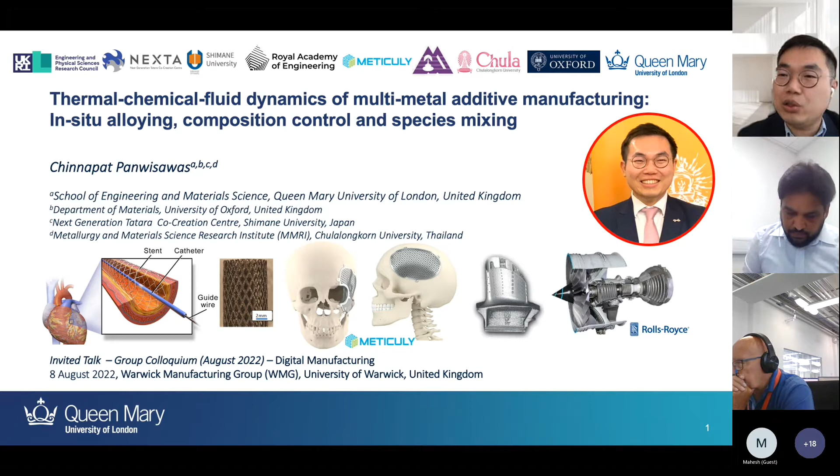So first of all, I would like to acknowledge the funding body from EPSRC and Royal Academy of Engineering, which actually supported some research activity in the past years, including the results from this presentation.

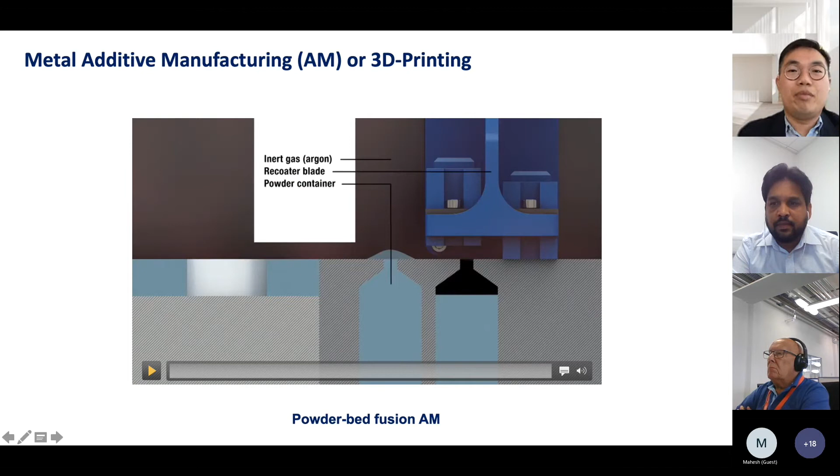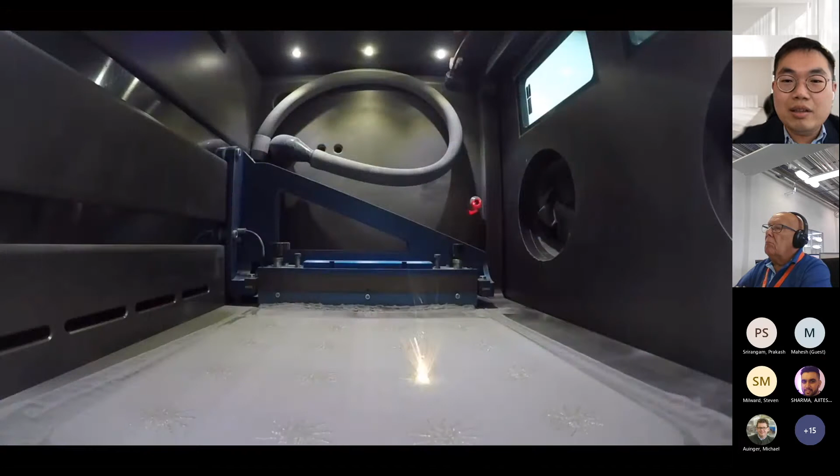So as you may know, nowadays people talk about metal 3D printing or metal additive manufacturing, or I would call it AM. One of the most popular techniques is called powder-bed fusion, where you have the powder spread onto the substrate, and then you use a laser to fuse them together, and construct it in a specific 3D geometry. There are so many things happening during this kind of manufacturing process, where you need to control and understand what happens in such a very small time and length scale.

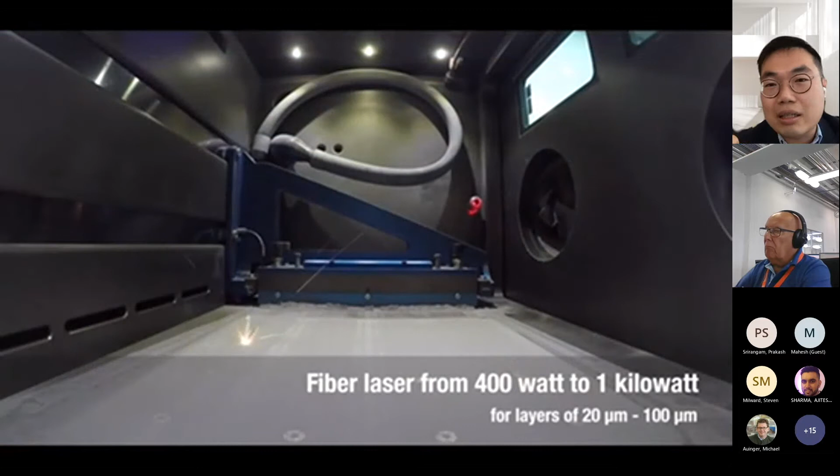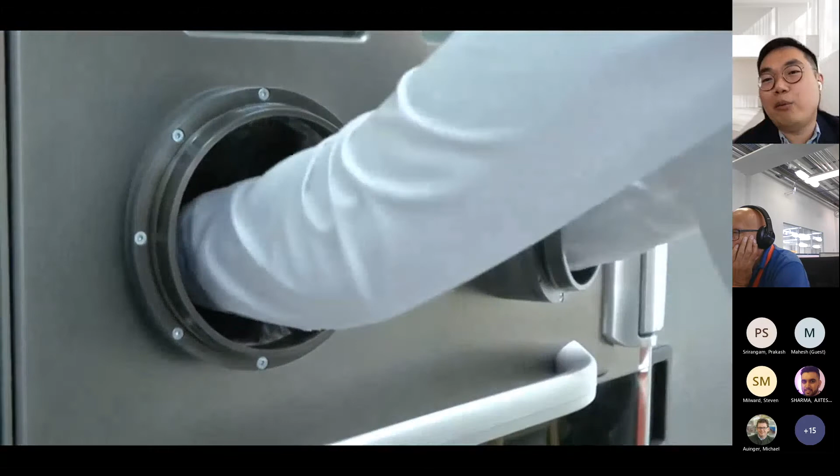As you see from this scheme, the laser beam size can be 100 micron in diameter, and then you fuse it in such a very short period of time. It leads to very extreme heating and cooling that make the microstructure and the property quite different from that of traditionally made alloys or materials.

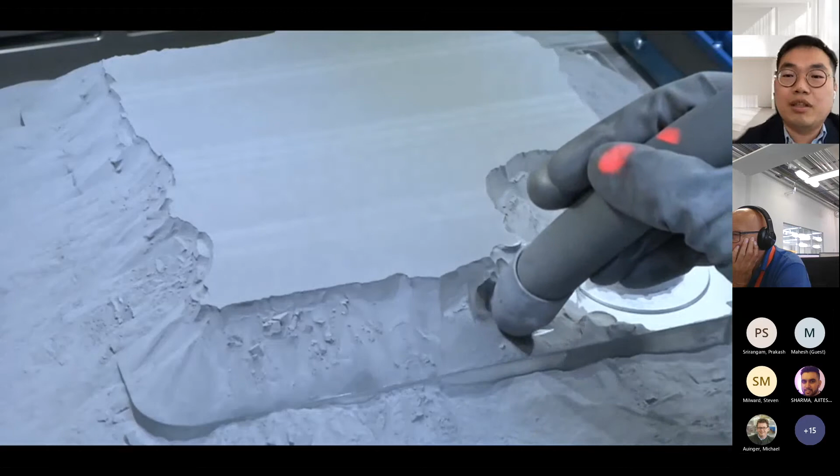So the talk today will focus on how we can see or understand the interaction of laser and matter to basically improve the process, to further develop multi-materials additive manufacturing. This is something I will focus on for today.

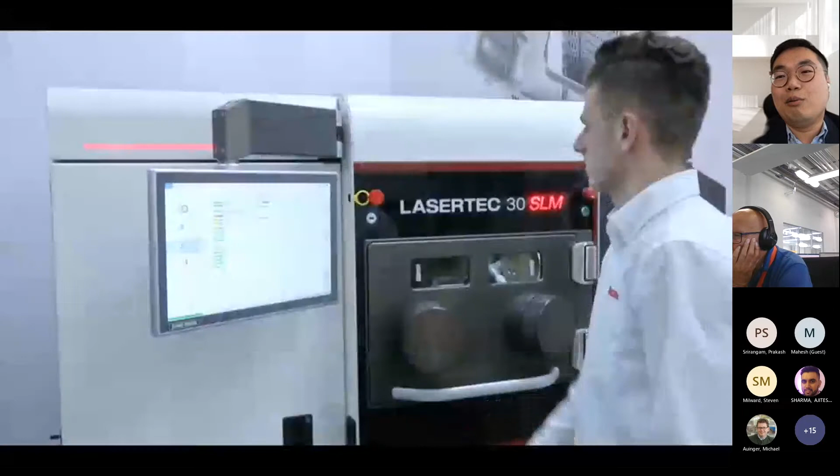And as you see, from the beginning to the end, from the powder and the laser until you get the component level, there's so many things involved in the process, which include the physics of laser interaction with the materials, the chemistry where you want to control whether or not you will get the same chemistry that you use as a powder. So, for example, some vaporization may happen, and then you get some chemistry which is not exactly the same as what you wanted initially. And then material design, definitely process design, in order to actually get the right condition for printing the part successfully.

Powder metallurgy to basically get good quality powder in order for you to get quite good quality of the part. And this is just the fundamental understanding that we need to put together in order to generate some kind of new approach to accelerate the technology using computational research, big data, artificial intelligence, and I will give you a little bit of the progress that we have been making in this field.

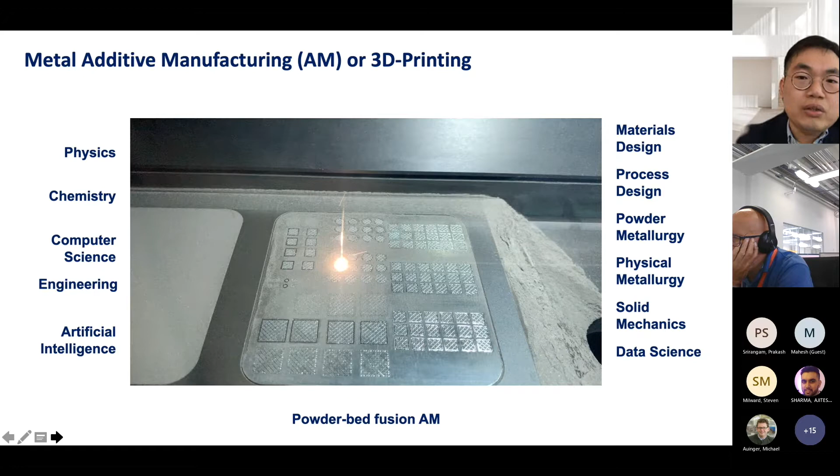So if I give you a little bit of background about the metallurgy in the specific field of the superalloy, I'm sure that some of you may be familiar with superalloy. Traditionally, we used a cast or wrought process to basically process this superalloy back in the 1940s. But every time we introduce a new process like powder metallurgy or directional solidification or single crystal casting even, we will introduce usually a new composition for that. That is because we optimize the material as a function of the process that you use.

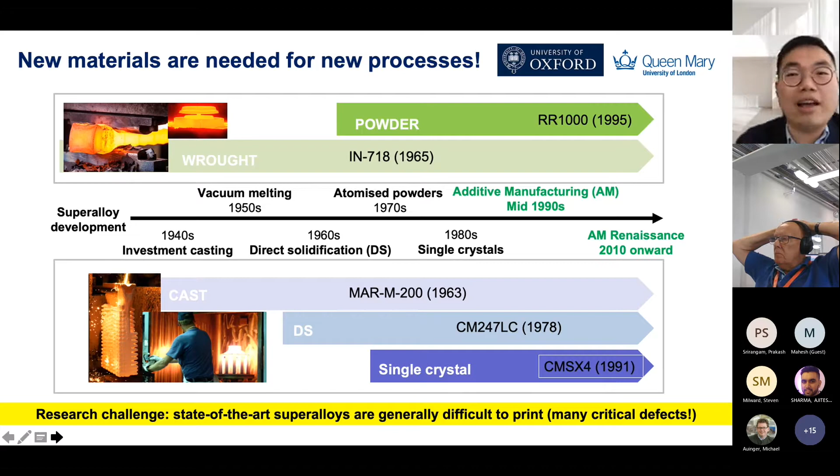It's probably the same for AM. That's because of the challenge at the moment: the state-of-the-art superalloys are generally difficult to print, so many defects can happen. So how can we go about it? There are two aspects: the first aspect is the materials, the second is the process.

In terms of materials, we can use an alloy design computational approach to find available compositions, benchmarked with traditional nickel-based superalloys. In this paper, we're looking at around 10 million compositions. We compare and benchmark with traditional alloys to come up with new processing and metallurgical windows that we hope will print better, based on physics-based models and merit indices for strength, creep property, and density. For process parameters, we're looking at freezing range and strain age cracking.

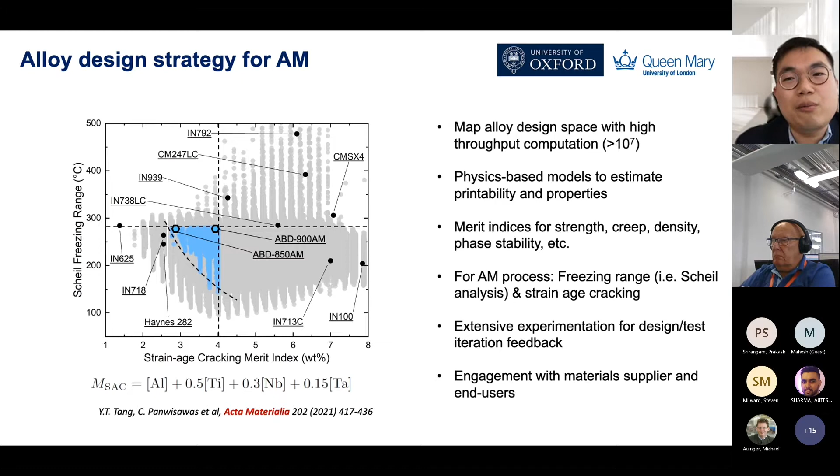This is a first step. We can say, okay, we want to find a new composition benchmarked with traditional available material that we want the property to match. Then we prove that with the new superalloy, we can actually print it better, so it's defect-free for a given condition. That's published in ACTA 2021.

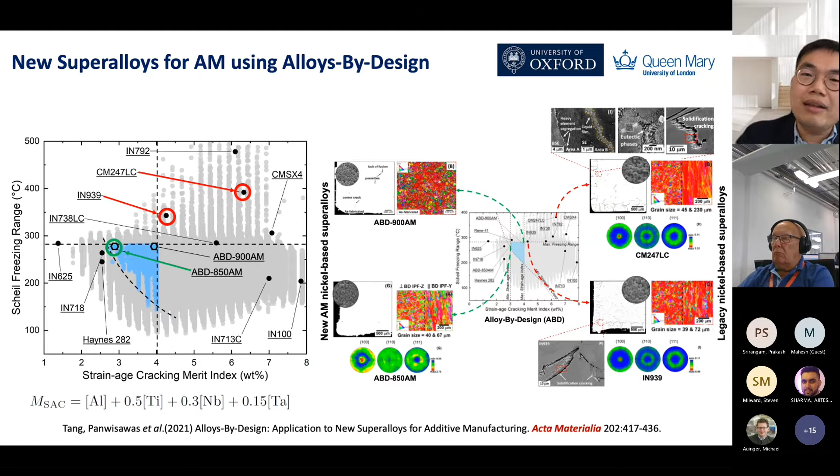In addition to the composition itself, we need to think about the process, because at the moment it's not just fabricating something simple, since additive manufacturing gives you more flexibility to fabricate. For example, you can do laser-based multiple metallic material additive manufacturing.

If you see in the middle of the screen here, the Eiffel Tower, from the bottom you see copper and steel on the top. There's a compositionally graded printing along the height of this Eiffel Tower. This gives us more flexibility to fabricate something we couldn't do before. The gradient has to be controlled in order for us to get the property, which may be a new property not seen before.

In summary, in this diagram, normally if you directly join bulk material A and B, it's a kind of welding. The gradient path method is a way you can do this using only additive manufacturing. For example, people try to fabricate stainless steel 304L with Inconel 625. This can be used for repair applications.

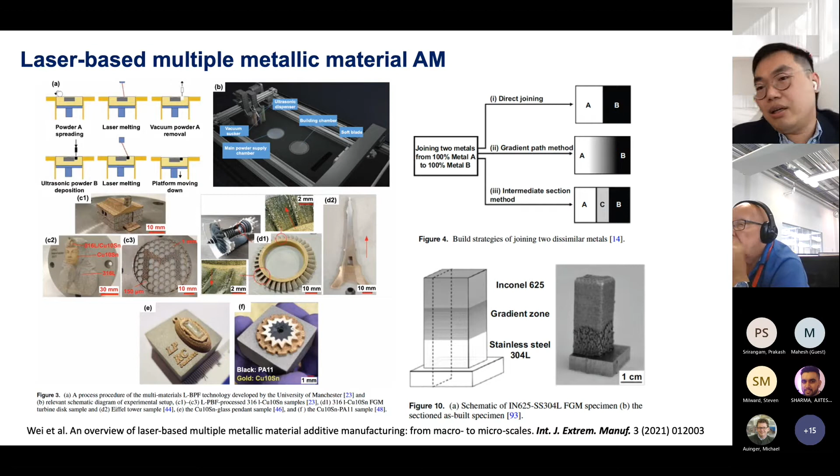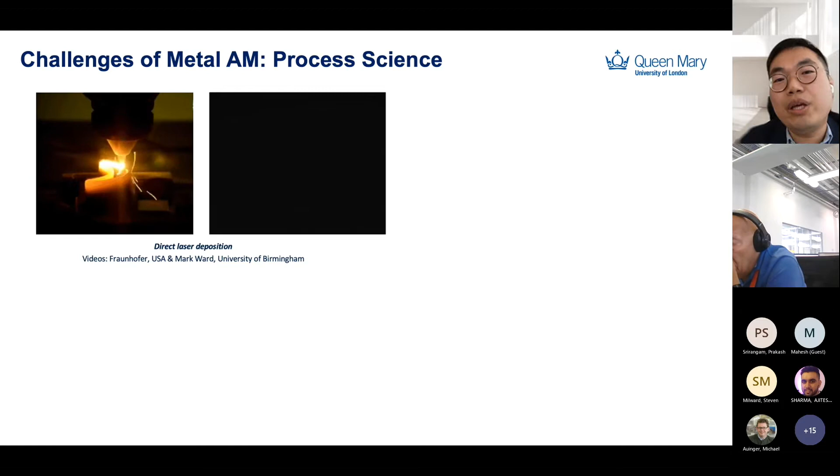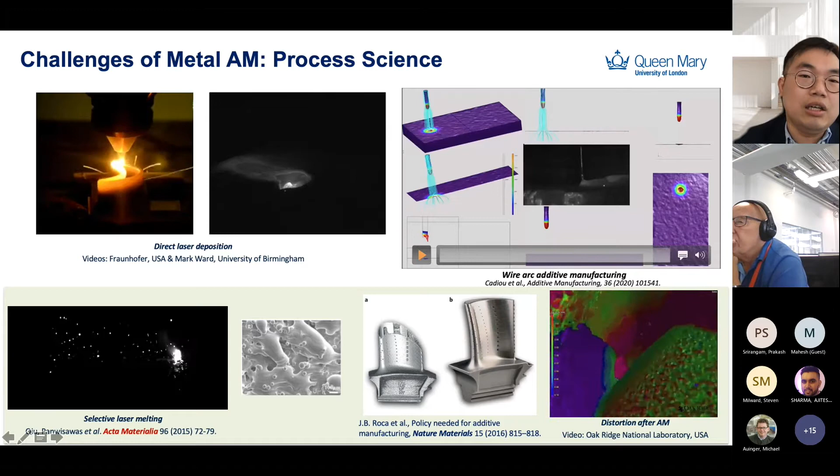But in order to get this technology successfully implemented in real manufacturing industry, we need to understand a little bit more. So if I try to summarize the challenge in process design, we're looking at three particular methods for 3D printing, which are direct laser deposition and powder bed fusion additive manufacturing. The thing in common is the interaction of the laser and the material, which is very extreme at a very short length and time scale. How can we go about understanding this in order to control subsequent microstructure and property scatter in the part?

If you look at some of my papers in the past, in 2015 we were looking at what's now called powder-bed fusion additive manufacturing, or previously called selective laser melting. If you vary just some process parameters, you can get totally different properties in terms of subsurface porosity, for example here. That's so important if you want to bring in a safety-critical component like a turbine.

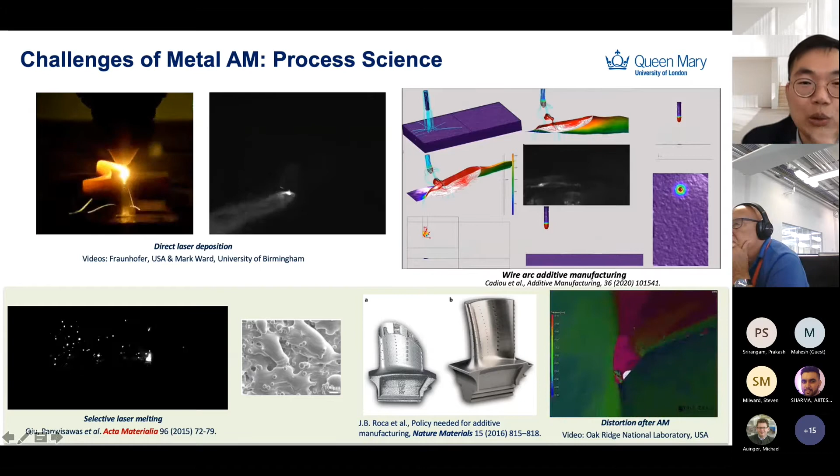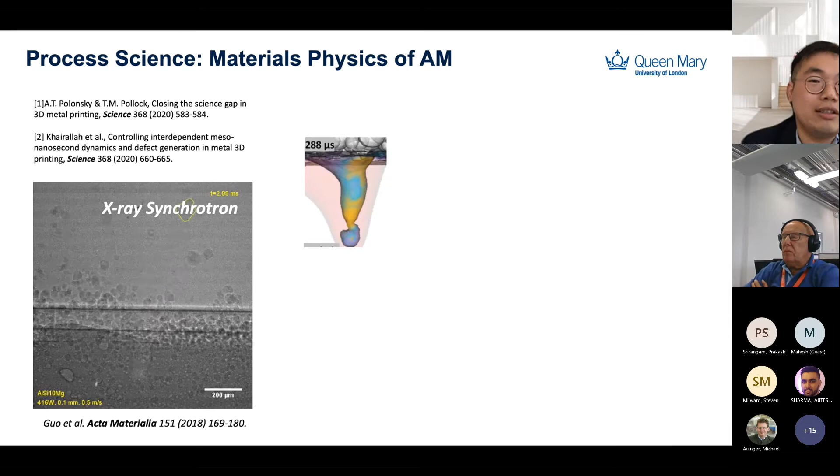So now we will go inside into the melt pool, into the printing technique, printing science, or metal physics behind that. If we zoom in further to see what happens during the interaction of laser and powder particle, you'll see there's a lot going on - it's not as simple as in the previous slide. You see some particles flying away, and a summary of what's going on: you see the melt pool, the laser beam interacting with this vapor jet domain, which ejects particles from this domain. So you can actually divide the physics associated with each phenomenon happening in this process.

To summarize all this, once the laser interacts with the material, you can trigger particle dynamics, which is very important when you have particles flying away. But more interestingly, we want to look at the thermofluid dynamics, or the printing, where the laser interacts with the material - what's going on, because it's very important to control this in order to get the right solid state transformation, solidification, and subsequent defects induced during this process. How can we understand this few-hundred-micrometer scale in order to control the whole process?

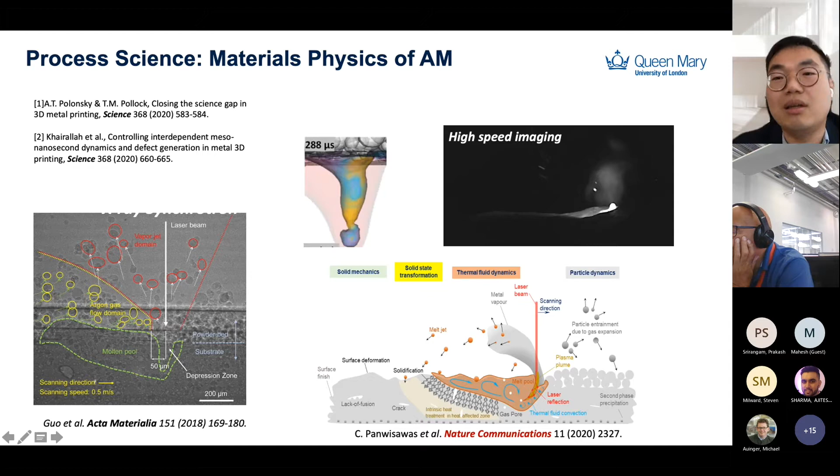That is the challenge, by understanding the material and the process together. So this is something we call AM by design. We look at composition and the process together in order to control these two together.

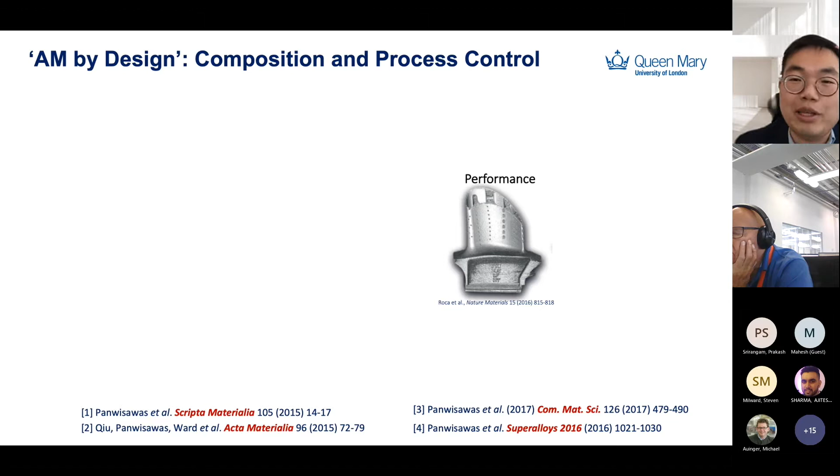Traditionally, when we want to design something, we start from what we want to get out of it in terms of the property. But for AM, we rather need to understand the processing science that actually governs the property or the microstructure which emerges from this kind of process.

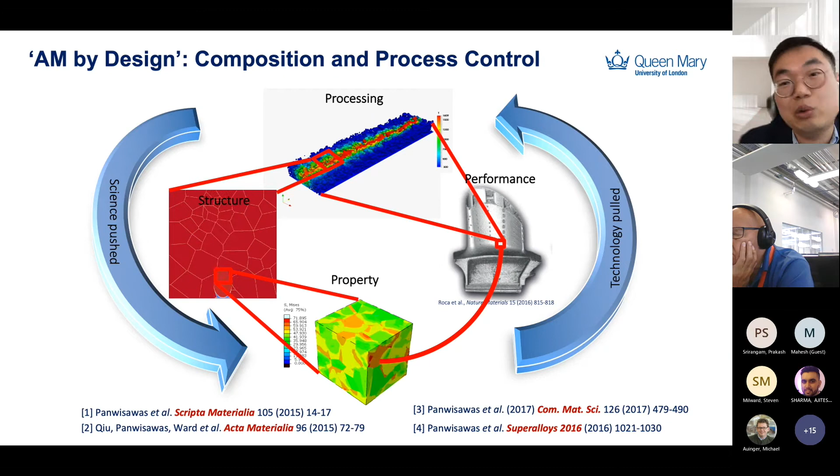That is quite a challenge, because the cooling rate, the thermal signature in this process, is a rapid and repeat cycle, and that makes the microstructure a very unstable or non-equilibrium state. This has to be understood in order for us to design the new component or the new property that you want, to match with at least traditional manufacturing processes.

So the way we have been doing it in the past years is using an integrated computational material engineering approach, in order to answer what is the manufacturability from this process, once we understand the interaction of the laser and heat source, and what is the important key process variable that controls everything.

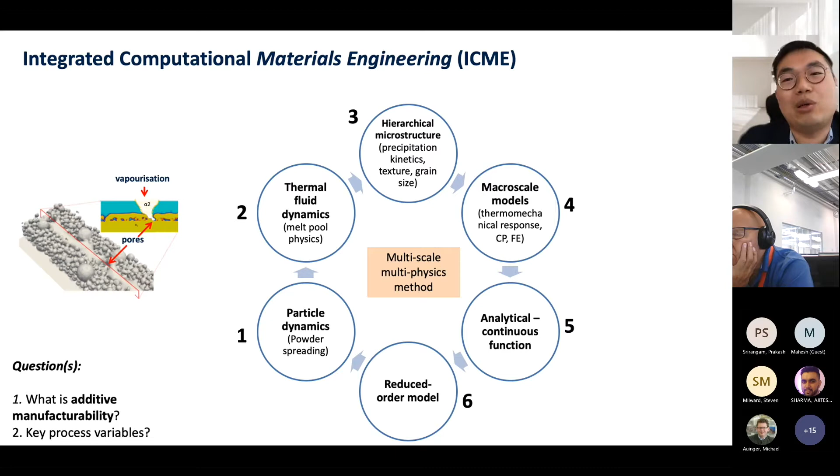From the particle dynamics in the tens of micron length scale to the thermofluid dynamics in the melt pool physics, how it's actually printed, what is the solidification sequence that we want to know as well from the solidification model, and hierarchical microstructure simulation, precipitation kinetic simulation, for example, to understand the scatter in the process.

It's not just everything deterministic now. We have to control the noise from the printing process, and then we hope that after we understand this micro scale information, we will bring it up, link it up to the macro scale behavior using crystal plasticity or finite element type of approach.

Moreover, we really want to go further to complete the loop of the reduced order model, where you take the information or knowledge from the lower length scale to scale up to the higher or macro length scale analysis, where you can retain the property or defect formation from the lower length scale in that big scale analysis. That is something we envision.

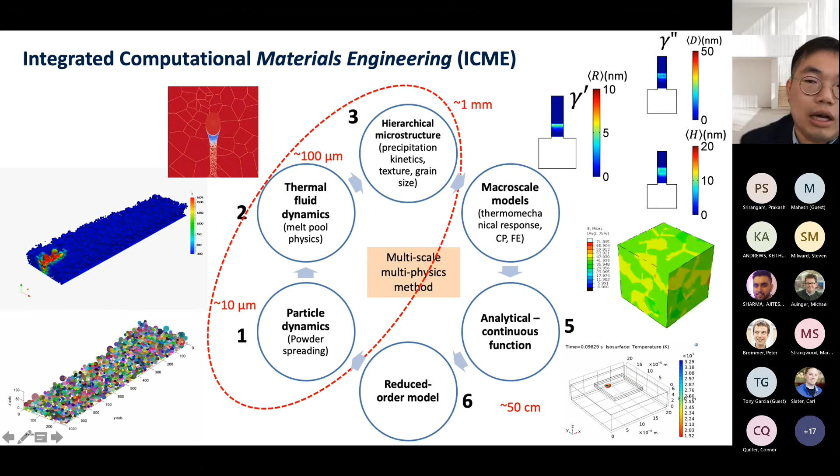Having said that, I want to start the real context of the talk today: chemistry process design for AM.

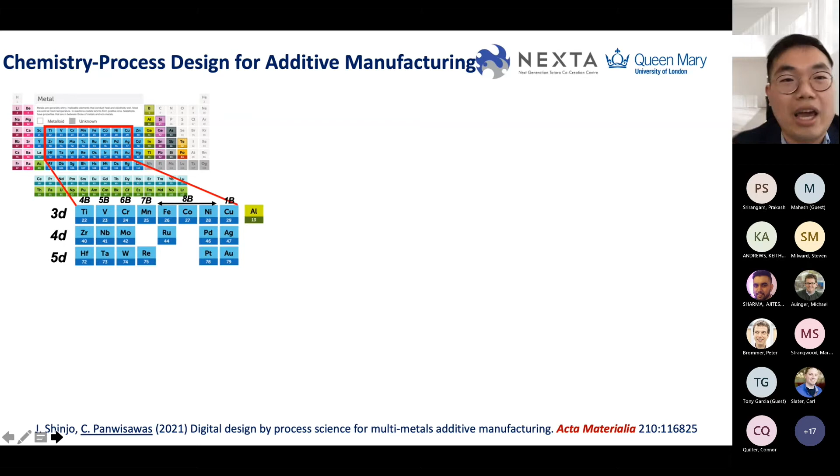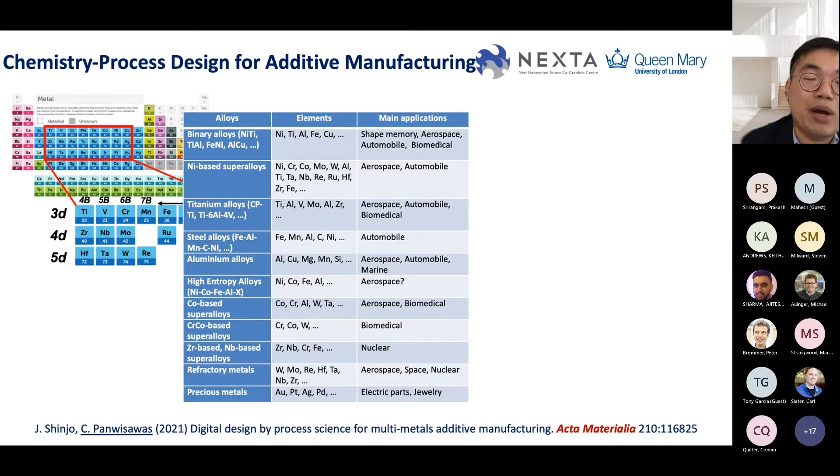High performance alloys are constituted by the transition metals in the periodic table. And the way forward when you want to fabricate multi-materials, additive manufacturing is to mix them together, like the technique called in-situ alloying, where you mix two powders together. This is one way forward we can do in order to do compositionally graded printing, as I said before.

Moreover, we can improve some property using this technique for current additive manufacturing applications. For example, in biomedical applications, when you have a binary system, a nickel-titanium system, the nickel is actually lost a lot compared with titanium, and you have to understand how it happens and how we can compensate the percentage lost by the process condition.

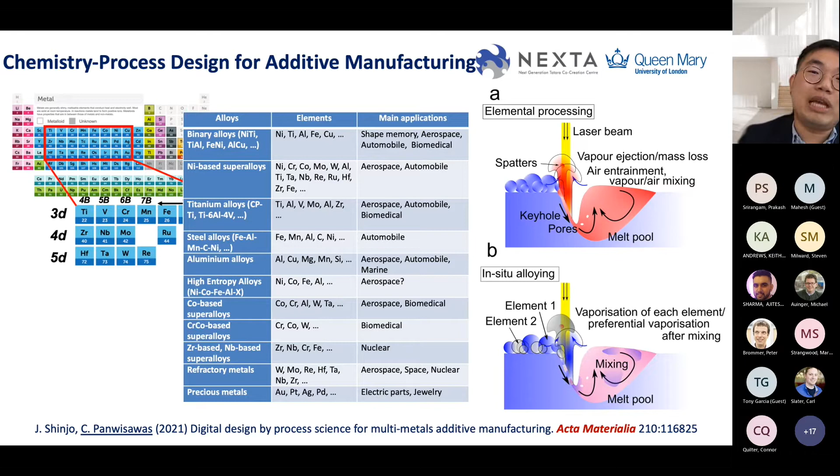So this is the ultimate goal of working on this. But we want to generalize this into the whole 3D, 4D, 5D transition metals, and then select some materials which are available in the aerospace, automotive, and biomedical areas.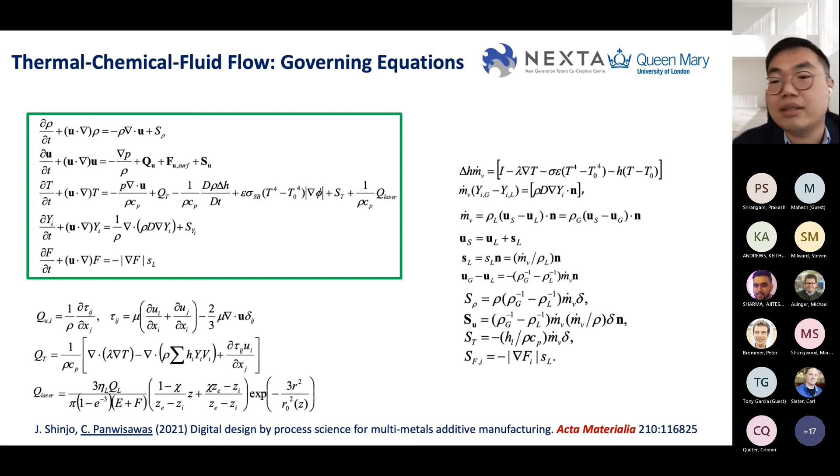Having said that, we want to extract some chemistry process characteristics using the thermal-chemical-fluid flow framework that we propose in this ACTA Materialia paper. I don't want to go much into the detail of the equations - if you're interested, please go review some of the equations there.

But more interestingly, we see some trends in these transition metals. If you look at kinematic viscosity versus thermal diffusivity - thermal diffusivity measures how heat actually spreads onto your bed if you use a powder-based fusion process, for example, and kinematic viscosity measures how fluid flow is actually generated.

And then you see that there is some trend in this property when you're looking at the liquid density of these transition metals. Manganese actually has a higher likelihood to flow in a wider region, or more viscosity, than gold, for example, which is a very heavy metal. But actually gold has a larger thermal diffusivity, which means the heat spreads faster by conduction.

You will see this easier when we actually put this into the simulation, where we're looking at titanium, nickel, tungsten, aluminum, and gold.

You will see that the characteristic to represent the additive manufacturing process has been captured using chemistry process relationship here. And then you will see that gold spread faster by conduction.

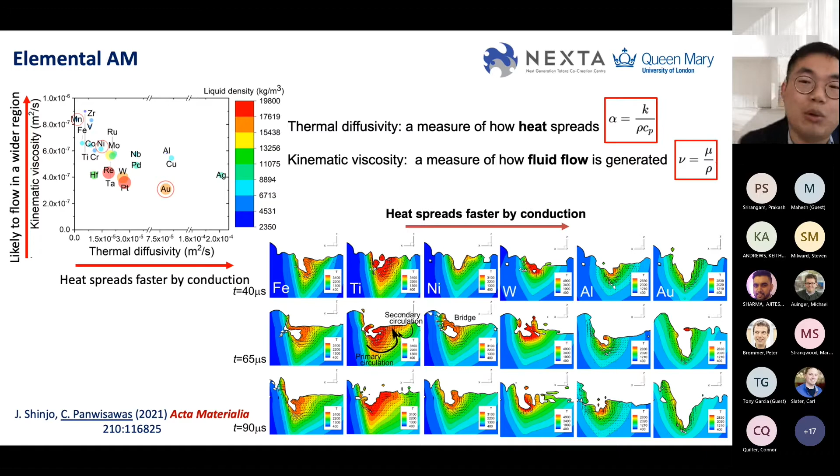But again, the fluid flow, which is actually less viscous than manganese or nickel, for example, that generate keyhole compared with some other material like titanium, where porosity only takes place. All these things have been summarized into a diagram we call the elemental AM diagram.

To understand the characteristic, especially the vaporization or mass loss, it seems that the heavier elements show larger mass loss. In the group 3d, 4d, 5d, the mass loss normalized by the atomic weight is in a similar range, but sensitive to the Reynolds number of the melt pool. The Reynolds number is defined here on the left-hand side, using the maximum liquid velocity, with the melt pool length scale given as a characteristic length for the Reynolds number calculation.

And then we can see that chemistry is dependent on the process, and we can extract some trend of the mass loss. For example, heavier elements show larger mass loss. The trend actually has a relationship with the flow, which we can't extract using traditional FE simulation if we're not considering fluid flow.

And the trend in the diffusivity is not very clear, and that's why there's something called Péclet number here. I have to note that this is at the representative condition that we use to apply for the whole range of material, which, as we all know, has to be optimized for a particular material system. But this kind of study gives us some guidance on how we can actually fine tune a material system to get better processability. That's a first way to do that.

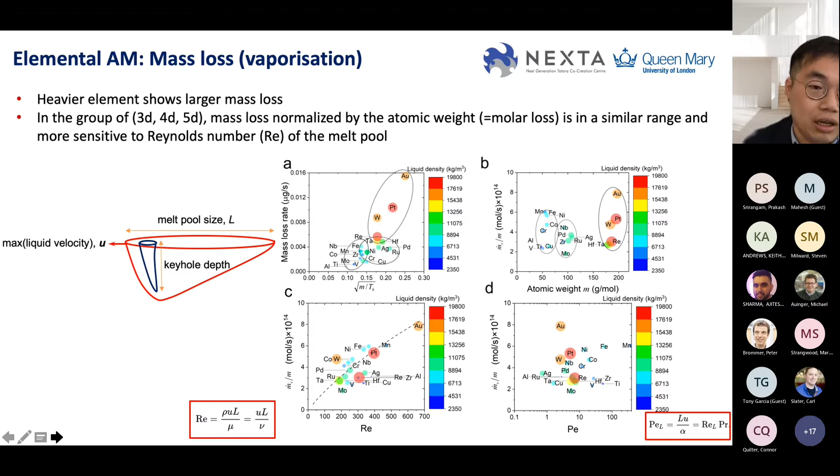So once we understand the elemental behavior, we want to mix them together now. The challenge is quite high because we have a lot of things we don't know, for example interaction term and interfacial energy. But we want to use some kind of traditional rule of mixture type of assumption to go further to get to the in-situ alloying of these two materials.

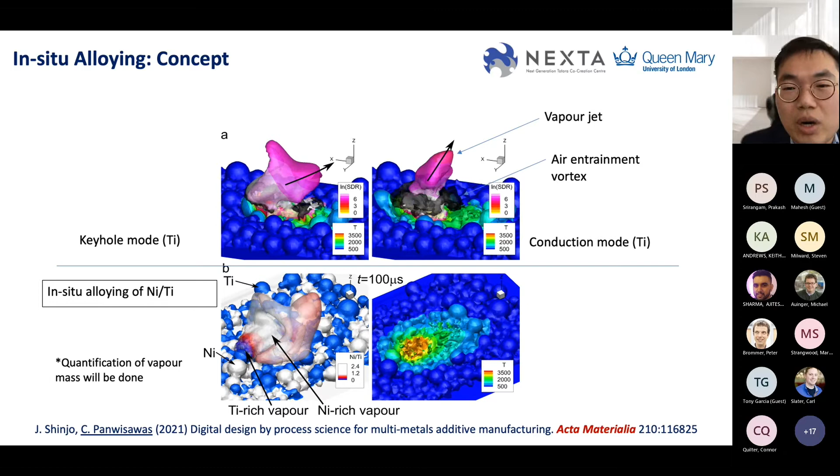For example, in this system we have nickel titanium alloy, where you can quantify the vapor mass or mass loss from a pit as a function of process parameters. And we can quantify the vapor mass as well. This is actually a very important step for us to understand how things mix together, which is why the title is species mixing.

So this is a concept, and once we implement this in a multi-layer powder-bed simulation, you will see that now we don't have only a single material. We have nickel 50%, titanium 50% spread onto the bed, and we can see how things mix together. If you choose the wrong parameter, you will see very clearly that the mixing is not very good, and that is why defects emerge or form.

Then you see after the second deposition, at this process condition, it seems that the mixing is quite good. But the question after this is how can we actually use this information further for microstructure development and property prediction.

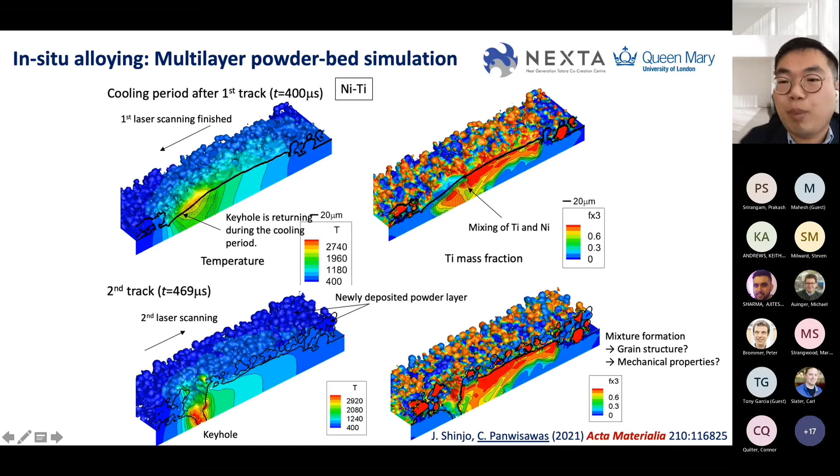So to give you an example, at the moment we use in-situ alloying to mix materials together under the beam, for a new metallic glass composite for better implants. As you know, traditionally we use titanium 64, a medical grade, for biomedical devices. We have a project supported by the Royal Academy of Engineering to explore another territory in terms of the material process system, where we can actually improve this.

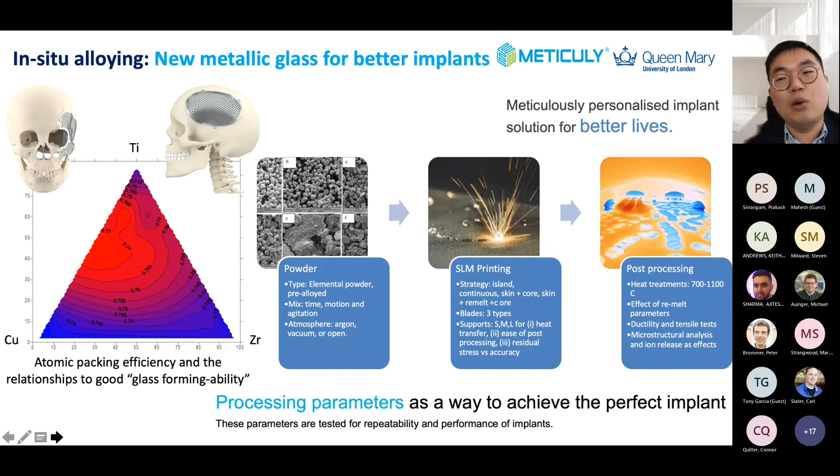So we are looking at a partnership with Thailand, looking at the titanium copper zirconium system, where we want to get the processing and chemistry right to achieve the perfect implant at the end of the day. Just to give you a bit of flavor of what we can do, we have to meticulously control chemistry and process, using representative process conditions that you will see from the chemistry map as a result of this high fidelity model.

There's some difference if you vary the process condition, and this can be quantified and predicted if we use this model. And not only that, we can link further to the solid state transformation. If we get this right, your thermal signature will be right. And not only that, the trend after this is actually chemical signature, which we need to get right as well for additive manufacturing.

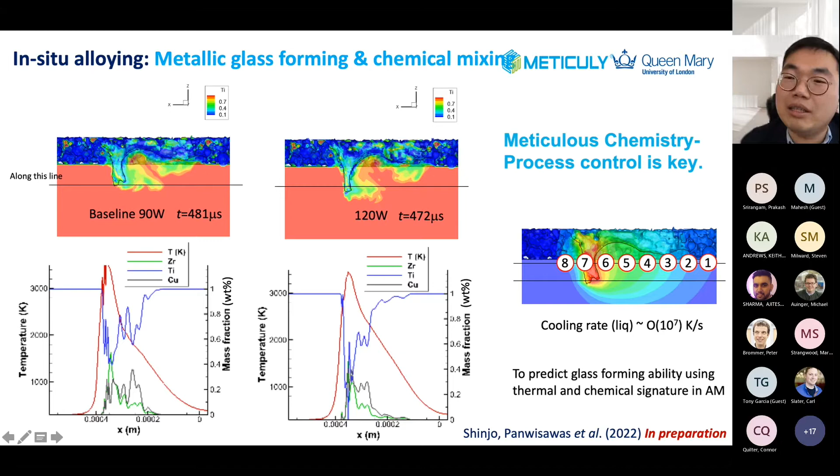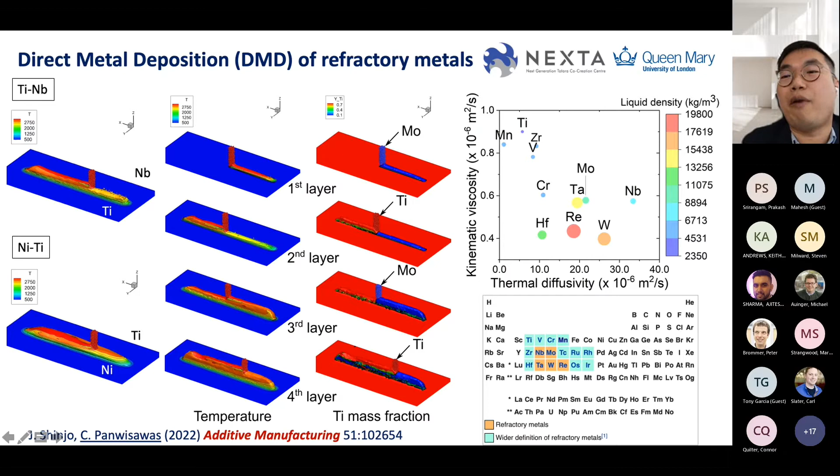That's because, for example, we are looking at the same map, viscosity versus diffusivity, but now we focus on the refractory metal. We can see from the next slide that there's a trend where some heavy liquid density doesn't mix very well at this process condition. You'll see tungsten makes a nearly laminated structure compared with titanium-niobium or titanium-zirconium. This is why some applications using tungsten additives don't mix very well.

But anyway, we can use this kind of simulation to explore even further how we can improve this mixing.

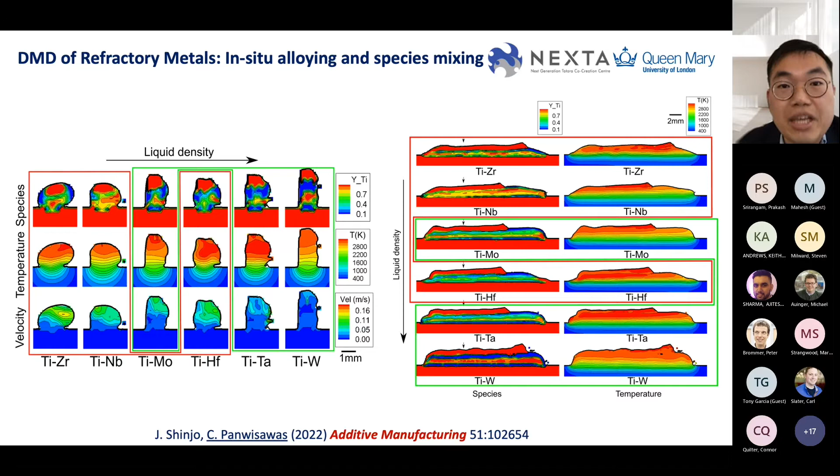So I'm now going to the next part of the talk. When you have mixing or thermal fluid characteristics, you want to link this to the grain structure prediction.

Simplistically, the first thing you do is take the thermal field from the simulation at the lower length scale, and then scale this up to the domain investigated, and the grain will follow the solidification front or thermal gradient, for example.

But in reality, this kind of simulation can be a statistical mechanics-based simulation, like Monte Carlo type simulation. Whereas if you want to impose more physical phenomena into it, we may need to use a modified phase field or cellular automata type approach, which we'll mention a bit later.

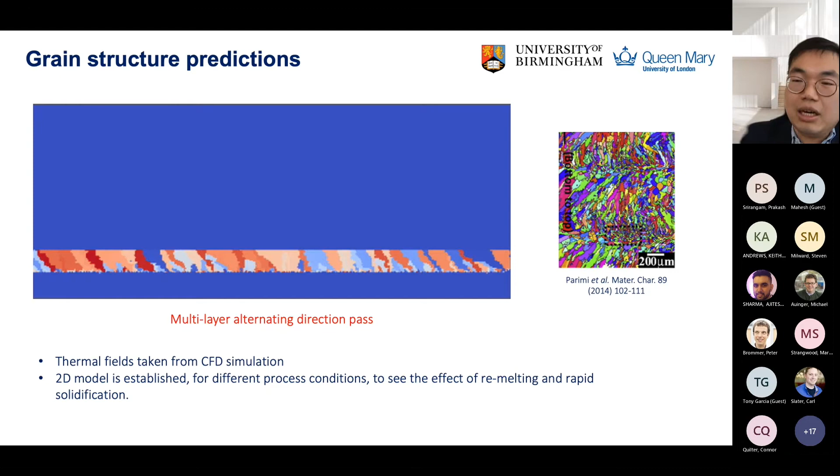So in order to understand the role, not just of the thermochemical fluid, but also linking this to the solute field, which happens in the solid state of the material, we are now investigating the role of the interaction of the laser and the powder as a function of chemistry. We can then elucidate phenomena like solute trapping or rapid solidification that leads to non-equilibrium microstructure. This work is quite important, because understanding how materials solidify is important for microstructure and property scatter in the process.

For example, if we use in-situ alloying, how can we understand the solidification pathway for that system? That's what we are developing a mathematical framework to do.

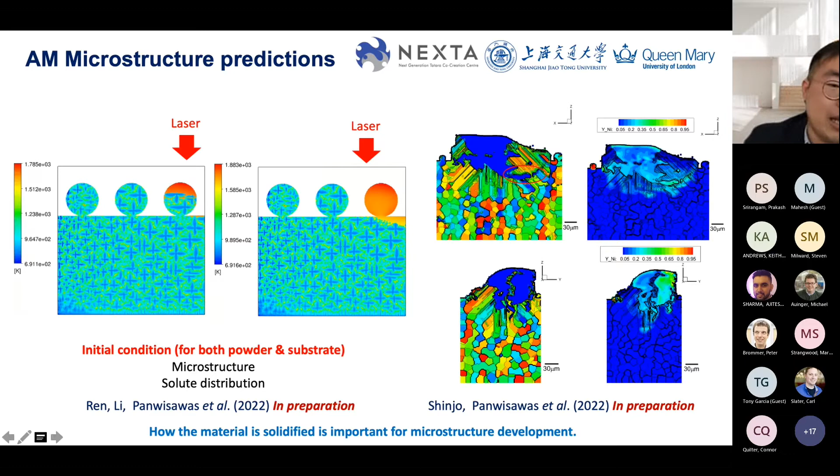Having said that, the next thing we're going to do is with regards to the precipitation model. As you know, there's some concern that the phase actually present in the printing is not as anticipated, because once you fabricate a nickel-based superalloy with high volume fraction...

...high volume fraction gamma prime nickel-based superalloy, you hardly see the gamma prime at the as-fabricated state. That is because of the non-equilibrium nature. Once you do some post-treatment, this starts coming up. How can we understand and maximize the use of the model in order to give some direction for the post-treatment?

This material is Inconel 718. If you want, you can follow our paper back in 2018 - this is 4 or 5 years ago now.

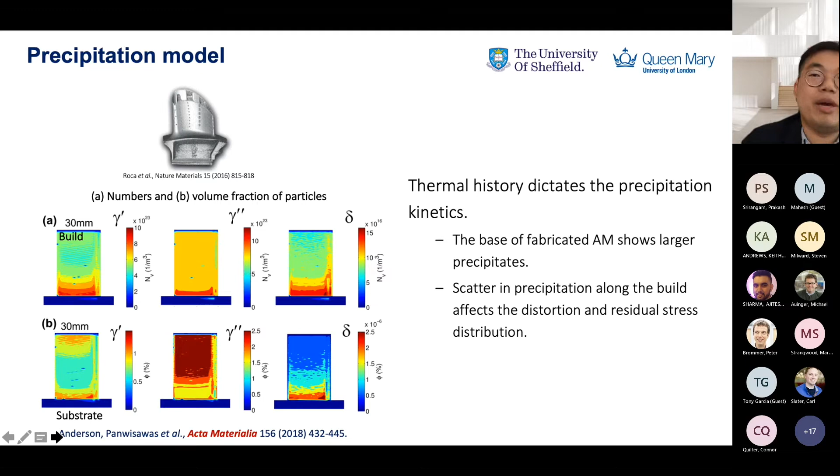So we can understand why and how the build is actually distorted and why residual stresses develop, once we link this kind of result to the mechanical analysis. So the ultimate goal, as I said, is, for example, if we use a nickel-based superalloy as a model...

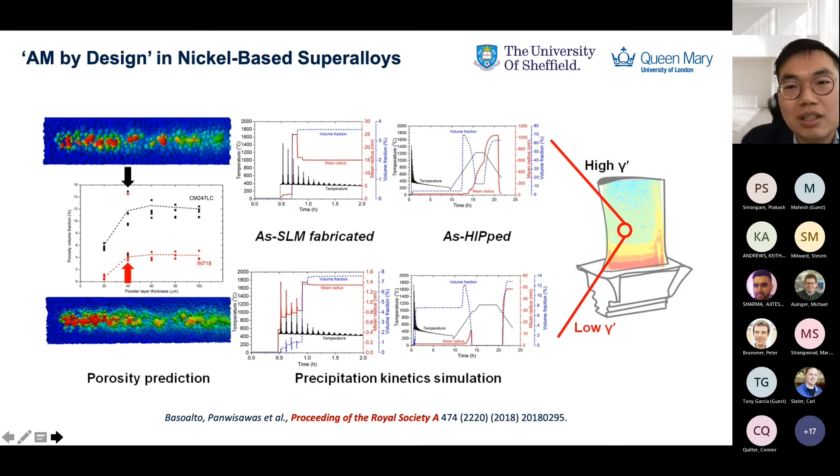...we can say we want a property of high strength, high ductility material like CM247. That's what the community wants to match the property or behavior to. But the problem is it doesn't actually work very well in the current printing condition. How can we improve that? We use computer simulation to understand from the printing until the post-treatment, in order to justify or rationalize why it doesn't work, and then how we can improve it. That is the next step we are working on.

So in the paper back in 2021, we published in Additive Manufacturing about the manufacturability of superalloy. We took 100 superalloy compositions, estimated or calculated their properties, and benchmarked against Inconel 718, which is a very well-known alloy that has a lot of fluid property measured.

So we benchmark on that, and then we generate a thermal fluid map to say something about manufacturability using porosity and cooling rate in the liquid state, as shown here from liquid to solid. Because there's a different cooling rate, as you may notice in your measurement if you do in-situ thermal imaging or monitoring, you will see that this actually happens. More importantly, from the high fidelity model, we can generate something called a mass loss map.

As well for superalloy, you will see from this, nearly 35 calculations here mapped in a contour, that the newly developed composition for additive manufacturing actually sits in the good printability region, where you have less porosity, less mass loss, and the cooling rate is not very extreme compared with some high gamma prime former superalloy.

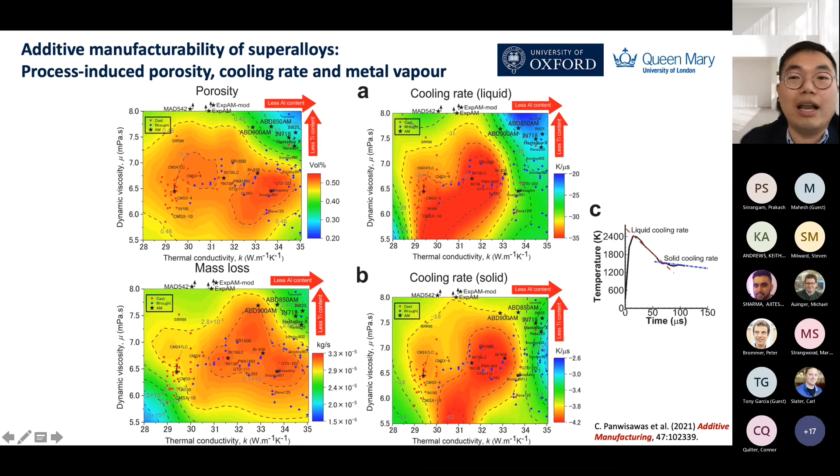And this is because if we understand this interaction and summarize the map for superalloy, you will see there's some hotspot from the thermal fluid point of view where you can get a processing window without a lot of mass loss or with a quite optimum cooling rate. I have to note that this is at a condition investigated, so we need to use this information to optimize further for a particular material, process, and machine for additive manufacturing.

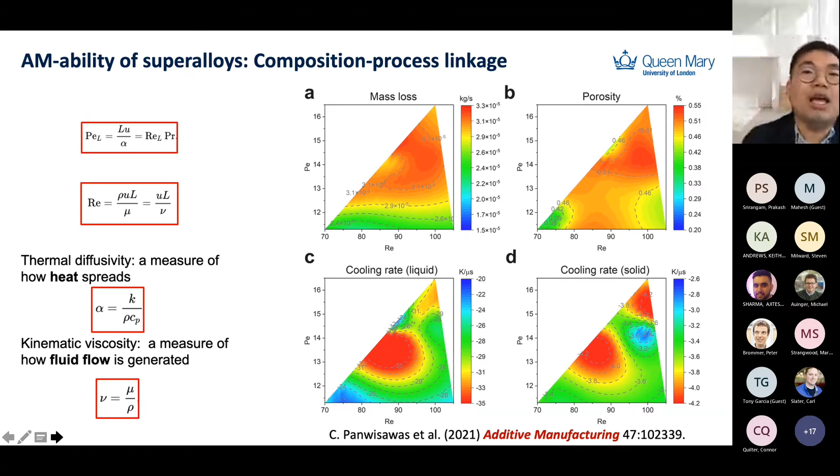And last but not least is how can we make use of all the lower length scale information for larger length scale analysis. If we look at material systems like Ti-64 or Inconel 625, normal thermal simulation available now hasn't taken into account much of the lower length scale information. But now we want to develop something called a reduced order model that takes information from the lower length scale into account in order to get the thermal signature right, and later the chemical signature right as well.

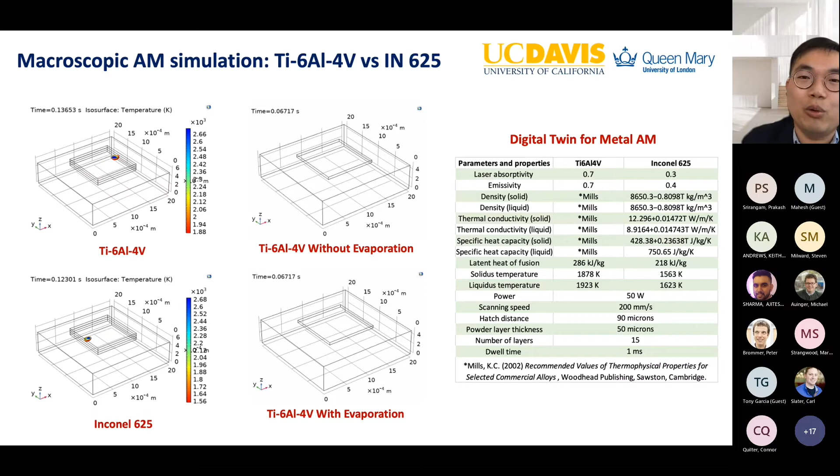So this gives you an example like Ti-64 with and without evaporation. You will see that the melt pool predicted is rather different. Once you're building up in height, you won't be able to get a steady state melt pool. This is why we want to develop this kind of model, but it's still not very cheap computationally anyway, though it's actually cheaper than the high fidelity model and can give some predictive capability.

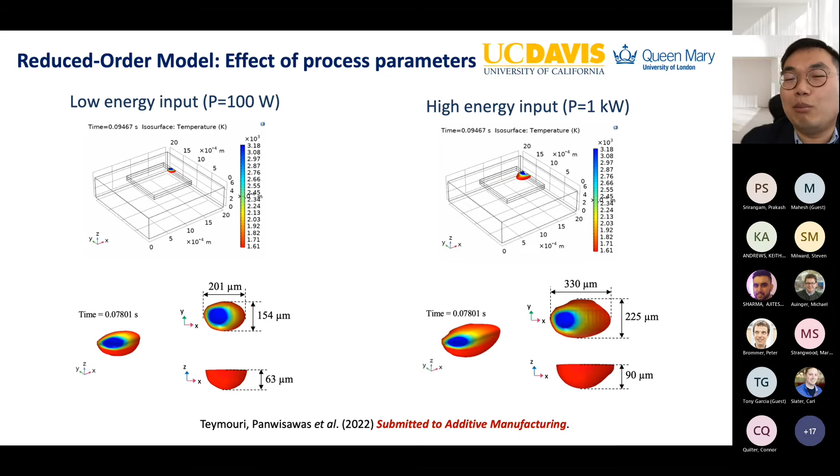For further upscaling or further digital twin type of model, this can quantify that model, capturing some physics of the prediction that you may anticipate from experiment.

And this one, we explore as well the territory of multi-track, multi-layer deposition, where we have fabricated, in this slide, 5 layers. You will see that the melt pool actually develops further and further. There's no steady state melt pool anymore in this process if you don't choose the right window to do so.

If you understand this kind of physics or underlying mechanism, we can actually optimize the process better, for currently available materials like Inconel 625, 316, and aluminum alloy.

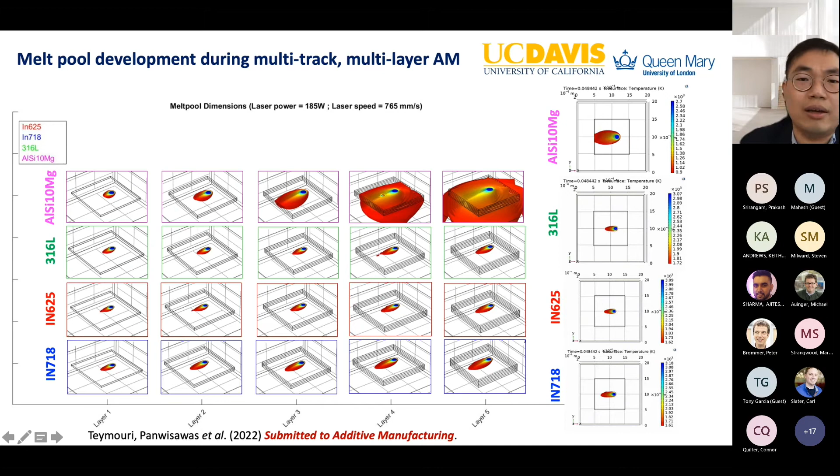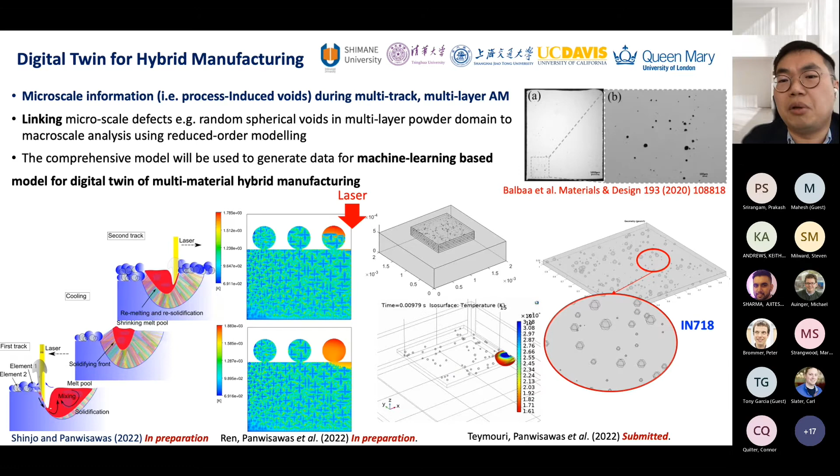Having said that, our vision is to develop toward a digital twin for hybrid manufacturing, to link up the micro scale information of defects to the macro scale analysis using this reduced order modeling approach. We hope that this comprehensive data from the lower length scale information can be further developed for a machine learning based model for digital twin of different or multiple material manufacturing. This is a work in progress to include all the defect formation as well in the process, that is something we want to do.

Having said that, I want to summarize the talk today. Computational fluid dynamics, or CFD, can be used to study liquid metal behavior, particularly in printing conditions for additive manufacturing. This understanding of the solid-liquid-vapor transition is key to capturing thermal and chemical signatures, defect formation, resulting microstructure, and scatter in the property. Prediction of this microstructure variation induced by localized liquid-solid reaction can facilitate process design for further developing a particular material and process system. And better understanding this scatter, as I said, a lot of things in additive manufacturing is stochastic, it's actually everything.

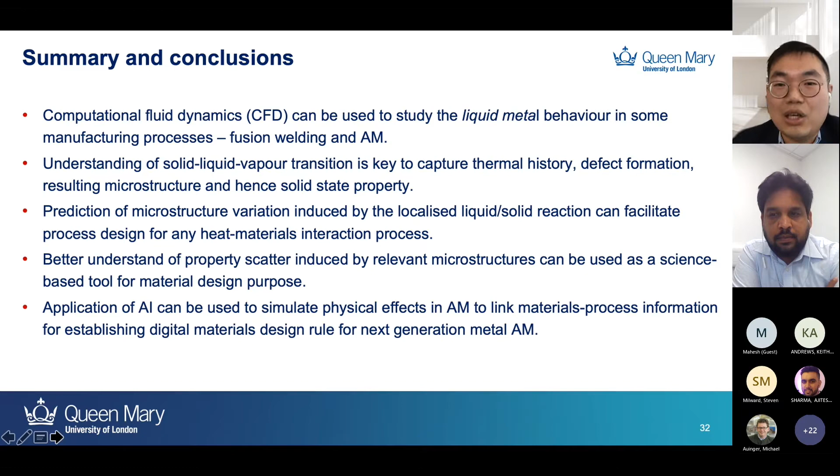So we have, how can we understand this noise or statistic of the process and use it for material design purposes, especially for new materials for additive manufacturing. We hope that this fundamental understanding can be used as knowledge for an AI-based model to simulate physical effects in AM by linking this material process information, establishing digital material design for next generation metal additive manufacturing. Thank you.